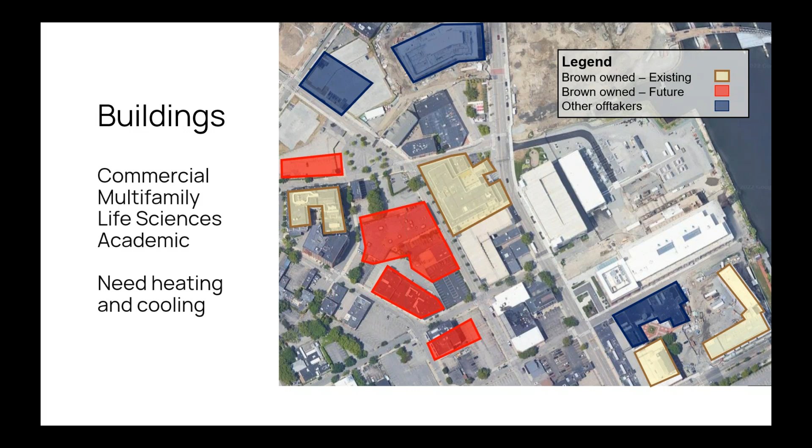So next slide, I think, is Bob. Bob, you still there? I hope. Yes, I am. I'm moving the slides, and it says my camera is still on, so I apologize for this.

It was a process where we gathered the key stakeholders and we held framing goal sessions to help define the key outcomes, and that ultimately led us on a few paths to figure out. We diverged to converge on potential solutions, and then we landed on our final solution.

So key stakeholders, I'm sure everybody on the call is well aware: we like to say early and often, identify and get your key stakeholders around the table early and often. Collaboration is king, especially at this point in the process.

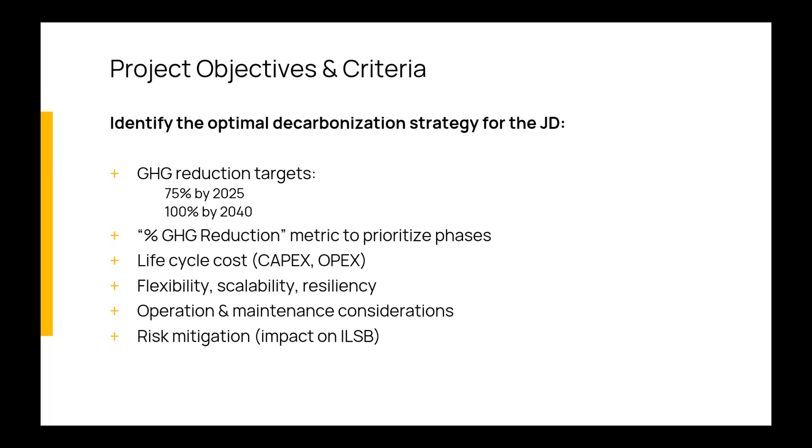And then for the project objectives and criteria, after many meetings, a very iterative process landed on solving for these most important targeted outcomes. This really became the lens our design engineers, JP and team, used to diverge on a few possible solutions and then converge on the one you'll see shortly. Now we'll get into technical solutions.

JP? Yep, thanks, Bob. Thanks, Dave, for the introduction. So now I'll talk a little bit about the different concepts that were on the table and evaluated to answer the question, what is the best way to decarbonize the Jewelry District for Brown? In a nutshell, three concepts were explored and developed. First one is to keep every building standalone.

After all, the few buildings currently in the JD, although there's a lot of potential and planned growth like Dave mentioned, are all standalone, so they all have their own boiler, heating and cooling plant, and backup power when it applies. So that was one potential pathway, to electrify and decarbonize every building standalone moving forward.

The second option, a little bit traditional, is to create a centralized plant where heating and cooling would be generated and distributed through a piping distribution network to all of the buildings around. And the third option we investigated is a newer approach on the market that we've seen in Europe and a few places in North America, an ambient loop.

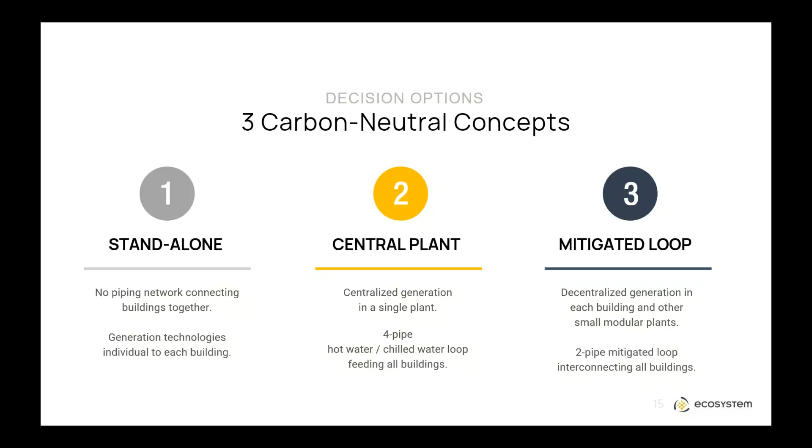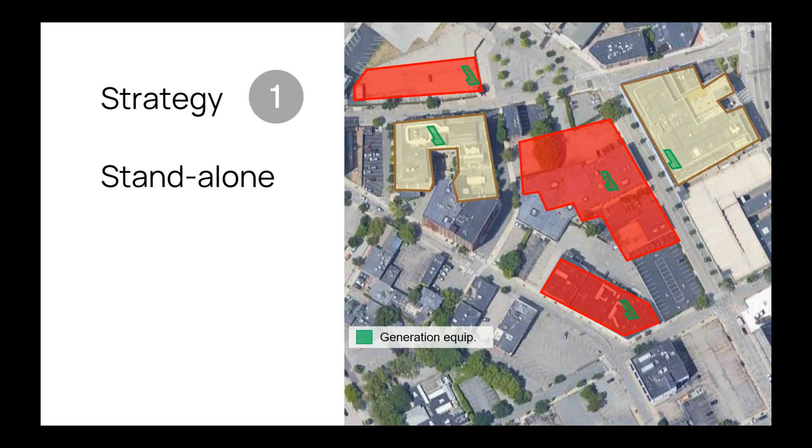So strategy one, let's install generation equipment to allow for decarbonization in every building. Strategy two, for that concept, next slide, you would see a central plant with hot water and chilled water piping distribution. In strategy three, you would see a mitigated loop that connects all buildings. And here, in every building, of course, you can't do much with the ambient water temperature directly. You can't heat or cool with it. However, you can exchange heat.

And in an example like the Jewelry District, where there's a wide variety of different building usage, a mixed-use portfolio of buildings, that loop allows to transfer energy in between buildings that's unused or excess heat that one building may have, and it can be transferred to another building that may be in heat demand at some point.

It also enables to connect to this loop, anywhere on the loop, some renewable energy modules, like the yellow block here that could represent any way to generate decarbonized energy. Could be ground source driven, it could be air source heat, river, or heat recovered from another site, and that can add heat to the loop.

And of course, in every building, then you need its own infrastructure of boiler, heating and cooling equipment, as well as heat pumps that become very central to the concept. Heat pumps that can take the low-grade heat in the ambient loop, which here is also called the 5th generation district energy system, and turn that ambient loop low-grade heat into usable heat to heat building loads, and also reversely the system can also dump excess heat from one building onto the ambient loop.

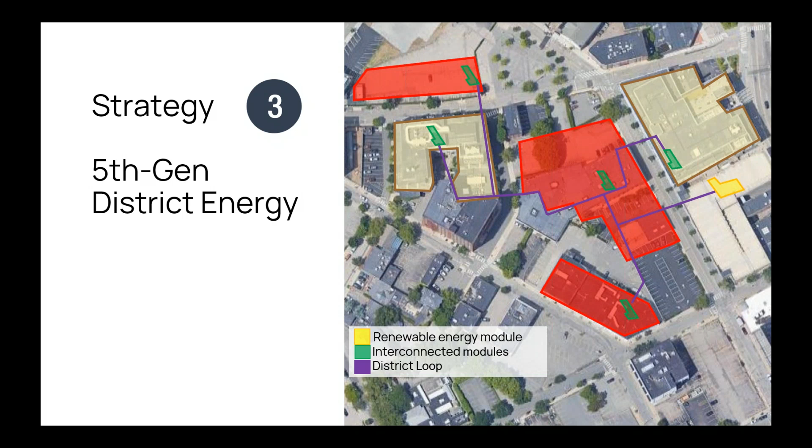So if you were to go with a central plant approach, how big do you size the central plant from day one, knowing that your users may double or triple down the road? Same with the distribution piping. And so with strategy 2, you start quickly to run into flexibility and phasing issues when the bulk of your users are not there yet.

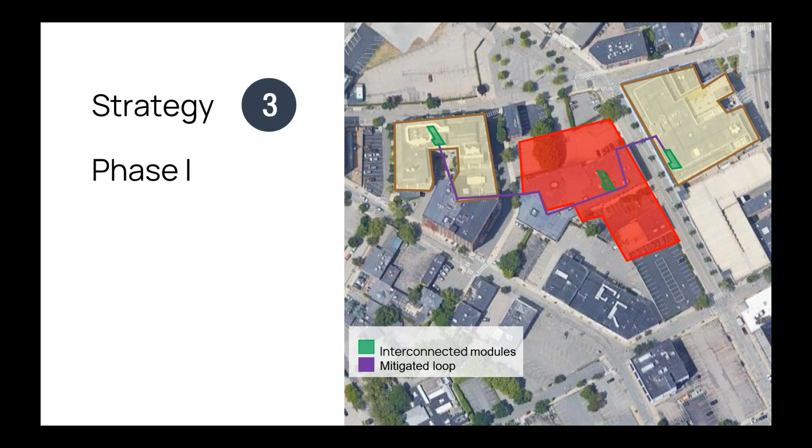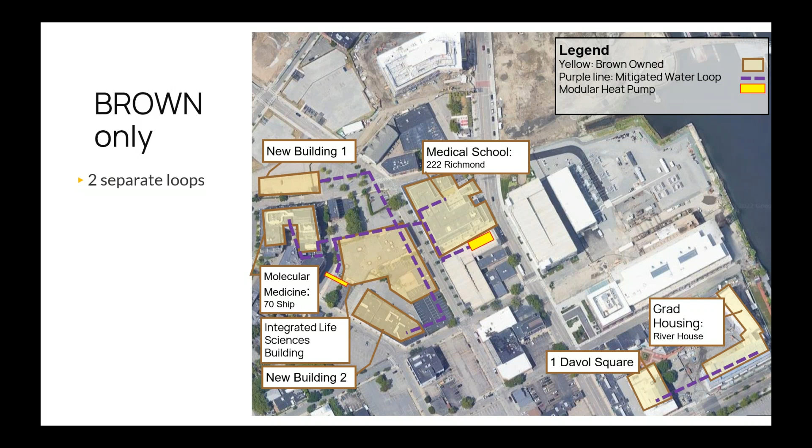And that's another potential avenue that we also considered, although it was determined that 2 loops was a little bit more cost effective, but it was also modeled to have one complete mitigated loop for the whole site, possibly connecting to other buildings up north.

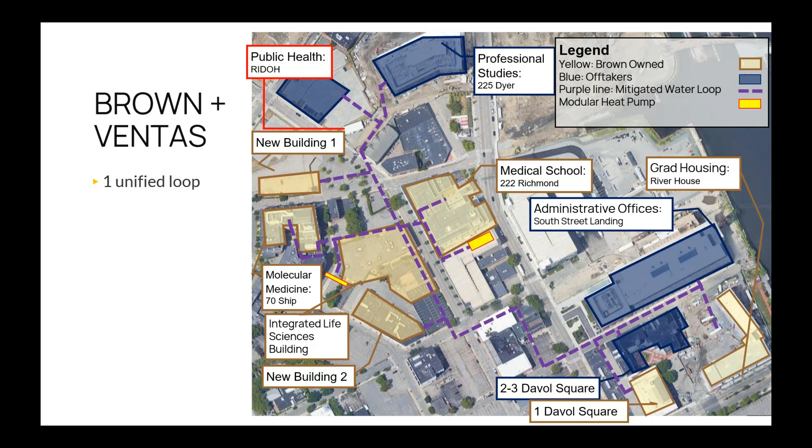Next slide, please. And I think here it's just to show the amount of heat recovery that's possible. With this system, it allows more heat recovery than with another standalone approach, certainly. And we've demonstrated that the new life science building will have a lot of heat recovery potential. It will recover a lot of the energy in the exhaust ventilation, for instance, and it will be in a position to export energy to its neighbor buildings a lot of the times, and those can benefit from that heat.

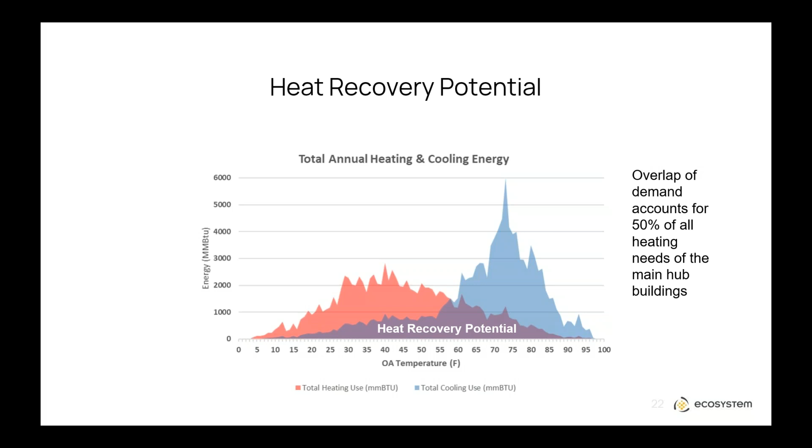The flexibility, we talked about it. The resiliency was very key to the discussion. And Dave, you can also feel free to jump in and add any thoughts and observations that you remember from those discussions. But resiliency is a very central theme at Brown, and the fifth generation district scenario, the third approach, provided the best resiliency because every building kept its own heating and cooling infrastructure. So we keep the generation close to the loads. That was critical for the new life science building.

But in addition to that, you could see import energy coming from surrounding buildings, and in many cases we were able to provide some useful heat with the mitigated loop directly. For instance, being able to preheat outside air, and so that provided some additional resiliency. Yeah, do you have anything to add on that slide?

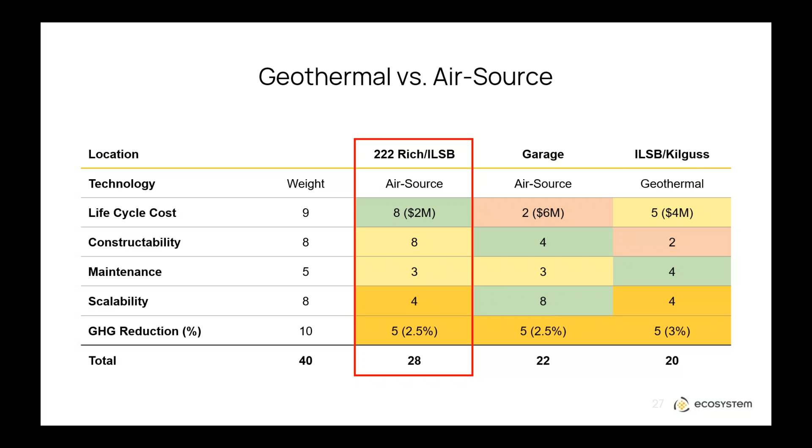other solutions than geothermal. And so that's why right now we're going with a first step being heat recovery, and of course thermal storage being the mitigated loop that could fluctuate in temperature over time, whether the group of buildings have excess heat or not for a certain number of hours, and air source could be plugged in as a second phase. So if you switch to the next slide, I think there's another, yeah.

And here, you know, that was another slide that shows that the left column, heat recovery, was a no-brainer, right? We were using that for heat recovery, and that's really the recommended approach. On the far right, we see electric boilers that were evaluated for the high peaks. That was the best life cycle cost for the electric boilers.

And in the middle, actually, that was a slide that showed the earlier consideration of various technologies. What would we pick between geothermal technologies, air source, heat recovery technologies, and even river heat recovery? And it was in that middle load of roughly 25% that we performed that deeper analysis. So which ones of those middle options would be picked?

And the IRA had a big influence because it was a fifth generation ambient mitigated loop system that could be used as thermal storage. The IRA had a big impact on the potential subsidies for that system, and therefore even though we're not going geothermal, we're still planning to have some good IRA subsidies with an air source approach.

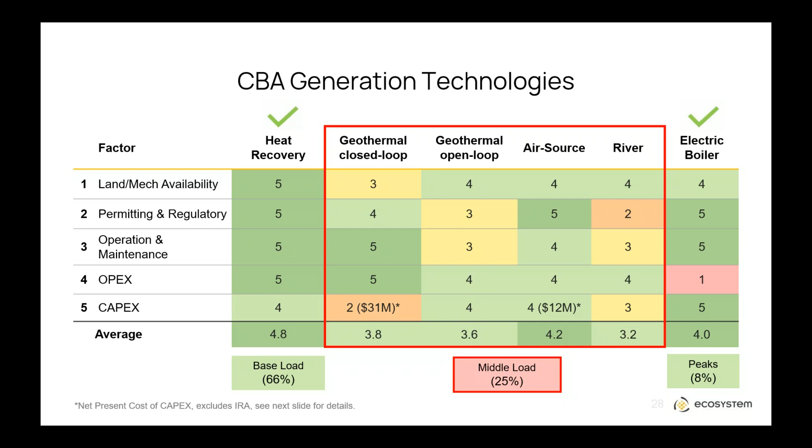Terrific. Okay. So now we need to figure out how we're going to pay for this all and operate and maintain it. Dave, if you could take us through the thought process at Brown that went into figuring out how you were going to do this. Well, I think you guys guided us through this. While we do have a decent endowment, we don't use that to construct decarbonization stuff. So we have to fund all this stuff. There was a chance that we could just have somebody else do this, and we just purchase the energy, right? I know a lot of our peers do that. It's an elegant way to get progress on decarbonization without a capital outlay.

So we did consider different ownerships. Could we involve other off-takers to make it a sweeter package for a third party? When we look at operating and maintenance, if we end up having our own loop, this would be unique. We don't operate a 5th gen type system anywhere else. Our new life sciences building is going to be quite complicated, and then we're adding new stuff on for decarbonization. Do we want to have the O&M expertise in-house to take care of this? There's advantages to that, there's disadvantages, or do we want to sub some or all of it out?

I mean, a lot of our chiller maintenance, we contract that out. Do we respond when there's a problem? Yes. Do we replace motherboards in them? No. So there's going to be the right balance for operation and maintenance, and so basically, Ecosystem kind of guided us through a process where we landed on sort of an integrated system where we're doing a little of both, right?

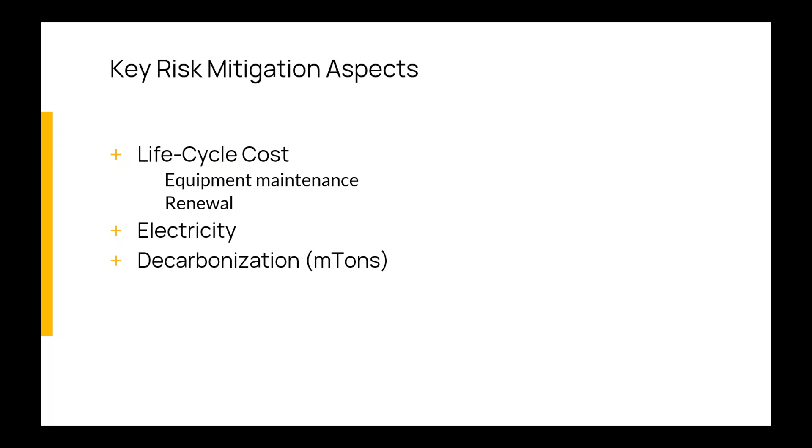But this is something that we've seen in our experience at Ecosystem over a few decades. When you have heat pumps, sometimes they don't perform, and the whole goal of installing them is to decarbonize. So all that to say that how to best support the operation and maintenance of that new equipment is critical to make sure that all these planning and design efforts pay off.

special characteristics of the Jewelry District, that there were potentially other off-takers, buildings that are not owned by Brown, that could have been part of a larger district loop owned by another entity, and Brown would have purchased energy. That didn't turn out to be the best scenario, but there are also some middle scenarios that were considered and still are, and that discussion is still ongoing. Brown hasn't landed yet on the very best way to operate and maintain those new heat pumps that will be introduced in their system.

So perhaps a hybrid approach where Brown has some operation and maintenance, but also has some support. And then the next step is to exactly define that support. What exactly does it consist of? How much does it cost? What's its value? And how do you quantify the value of that O&M support?